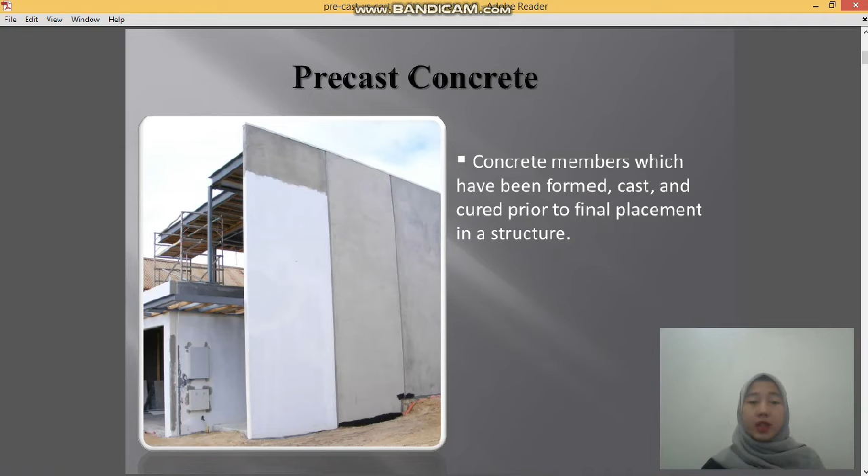Today, I'm going to explain about precast concrete versus cast-in-situ concrete. Precast concrete members are formed, cast and cured prior to final placement in a structure.

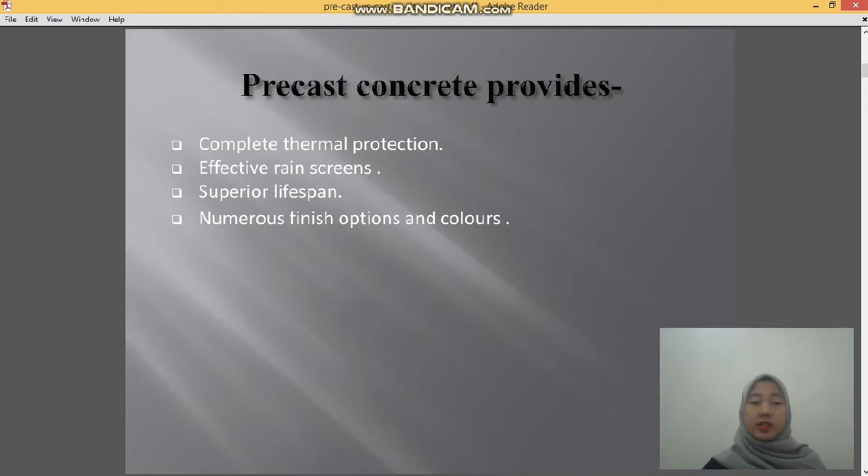Precast concrete provides: 1. Complete thermal protection. 2. Effective rain screens. 3. Superior lifespan. 4. Numerous finish options and colors.

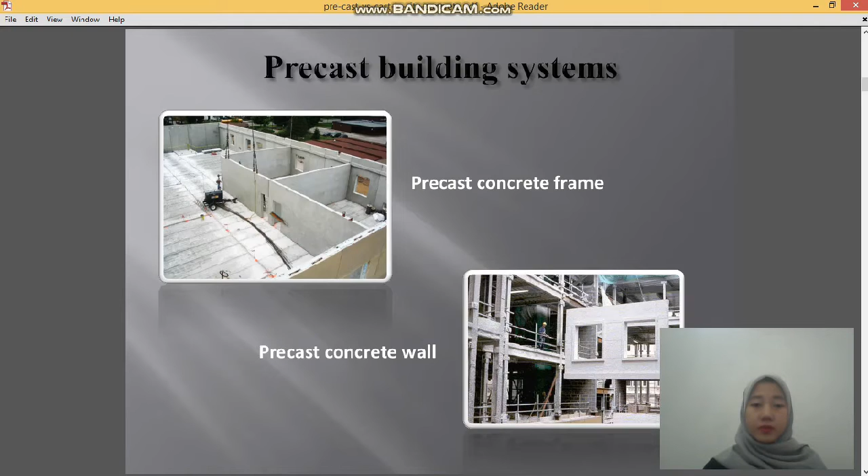Cast-in-situ concrete: liquid material is poured in form at the building site.

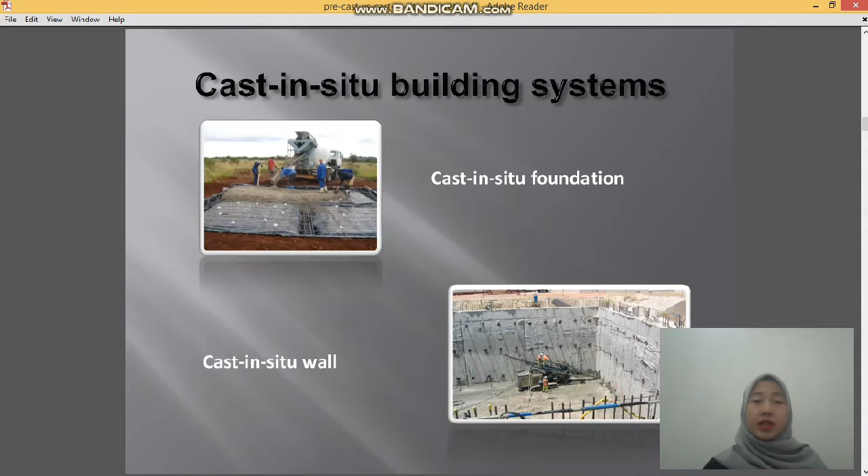Cast-in-situ building system includes cast-in-situ foundation and cast-in-situ wall stretch. Cast-in-situ concrete has less strength as compared to precast concrete.

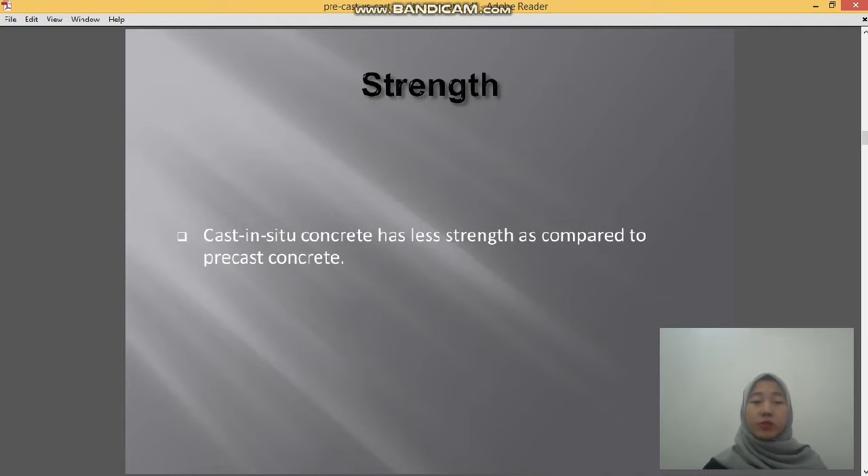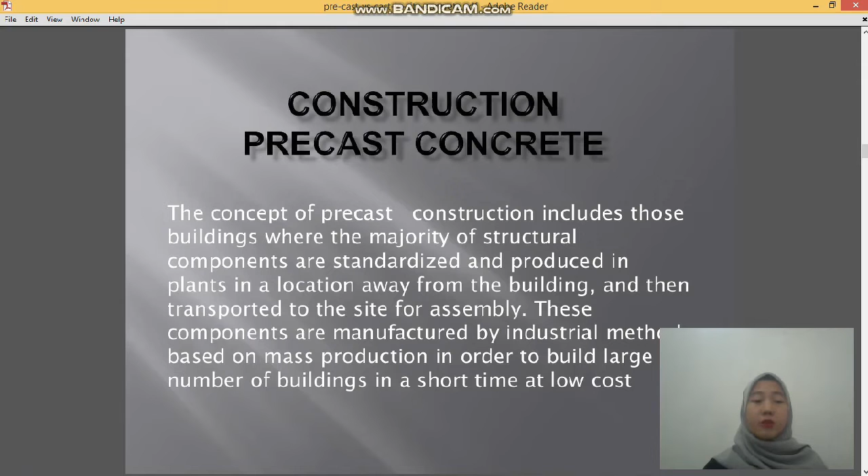Construction of precast concrete: the concept of precast construction includes those buildings where the majority of structural components are standardized and produced in a plant in a location away from the building, then transported to the site for assembly. These components are manufactured by industrial methods based on mass production in order to build a large number of buildings in a short time at low cost.

Depending on the load-bearing structure, precast systems can be divided into the following categories: 1. Large panel system. 2. Frame system. The designation large panel system refers to multi-story structures composed of large wall and floor concrete panels connected in the vertical and horizontal direction.

So that the wall panels enclose appropriate space for the rooms within a building, the panels form a box-like structure. Both vertical and horizontal panels resist gravity load.

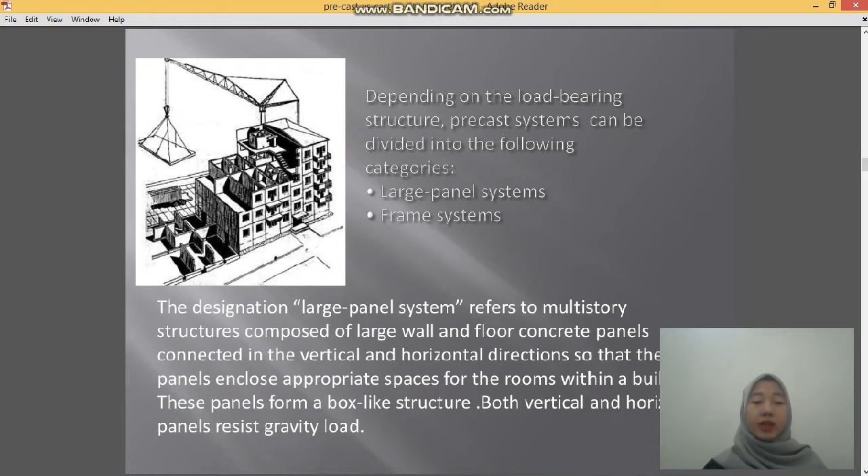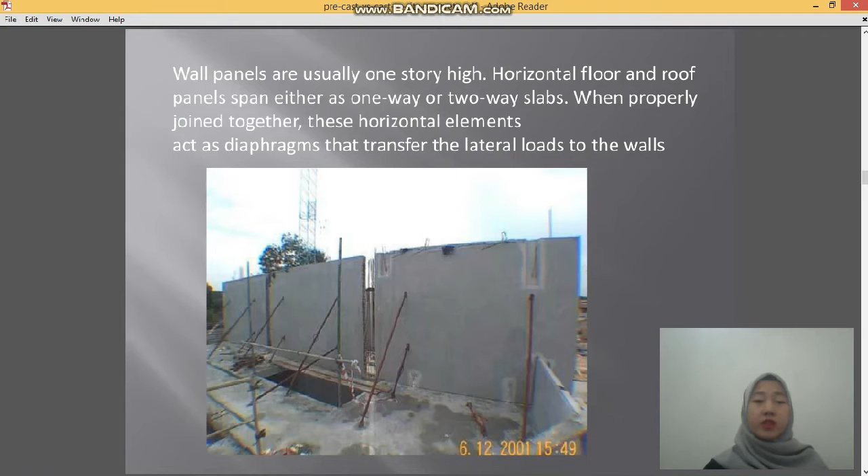Wall panels are usually one story high. Horizontal floor and roof panels span either as one-way or two-way slabs. When properly joined together, these horizontal elements act as a diaphragm that transfers the lateral load to the walls.

Depending on the construction method, these joints can be classified as wet and dry. Wet joints are constructed with cast-in-place concrete poured between the precast panels. To ensure structural continuity, panels are welded, looped, or otherwise connected in the joint region before the concrete is placed.

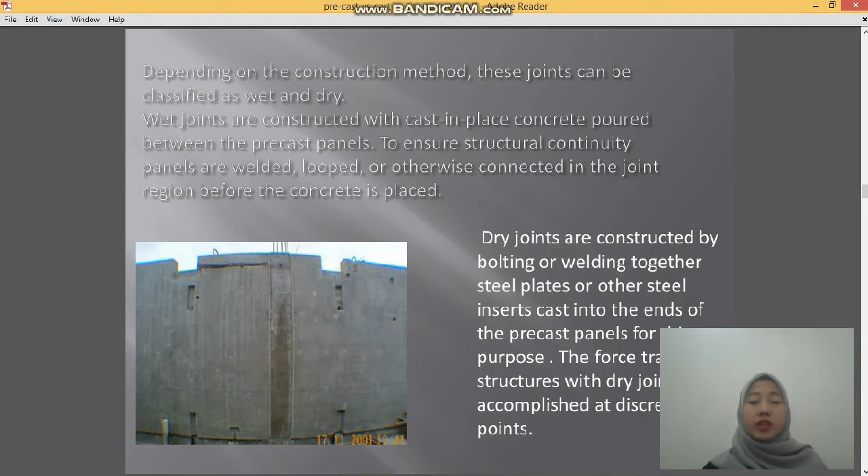Dry joints are constructed by bolting or welding together steel plates or other steel inserts cast into the ends of the precast panels for this purpose. The force transfer in structures with dry joints is concentrated at discrete points.

Frame system: precast frames can be constructed using either linear elements or spatial beam-column sub-assemblies. The use of linear elements generally means placing the connection at the beam-column junction.

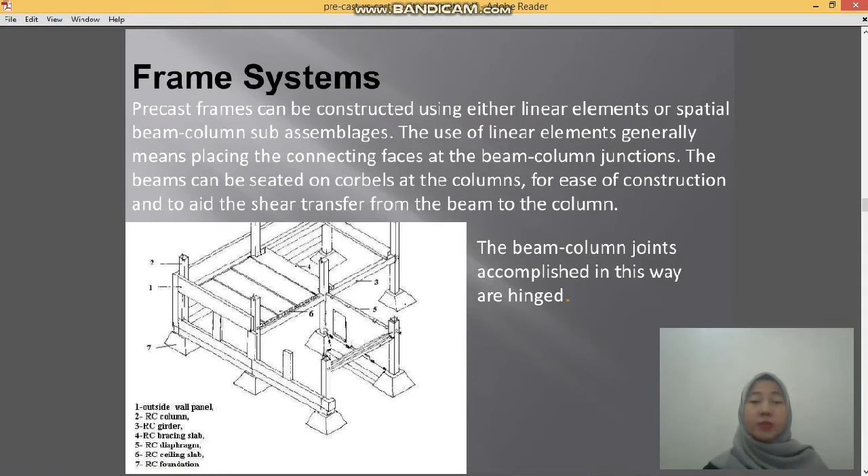The beams can be seated on corbels at the column for ease of construction and to aid the shear transfer from the beams to the column. The beam-column joints completed in this way are hinged.

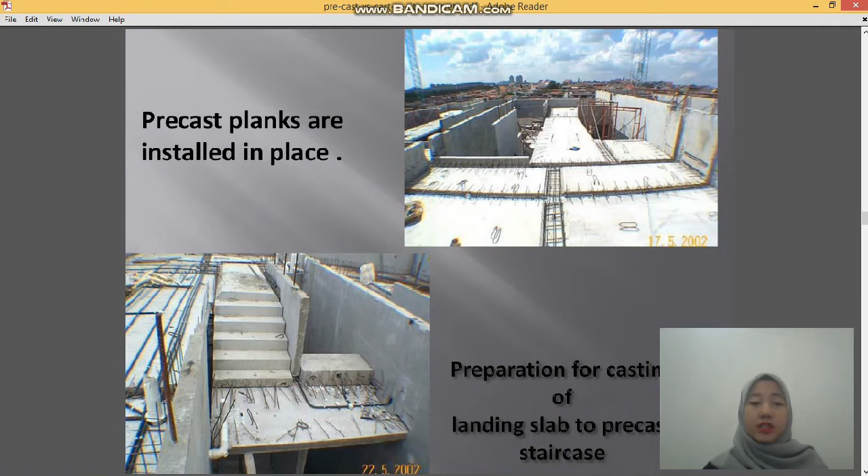Precast planks are installed in place. Preparation for casting of the landing slab to the precast staircase.

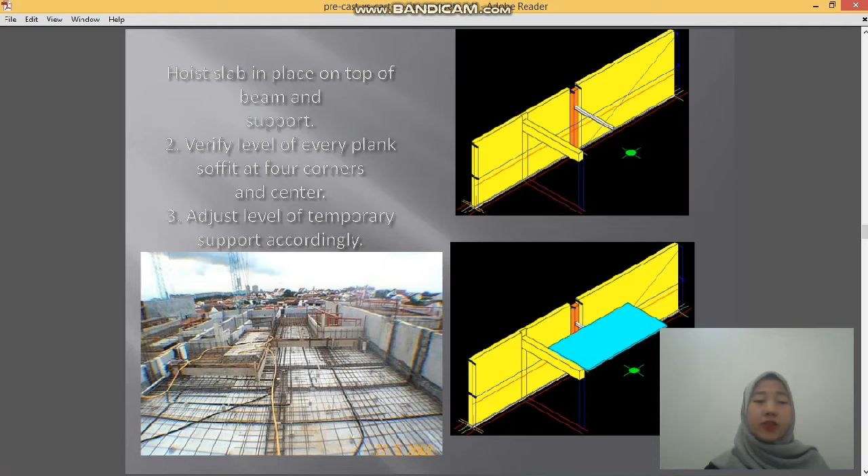1. Hoist slab in place on top of beams and supports. 2. Verify level of every plank soffit at four corners and center. 3. Adjust the level of temporary support accordingly.

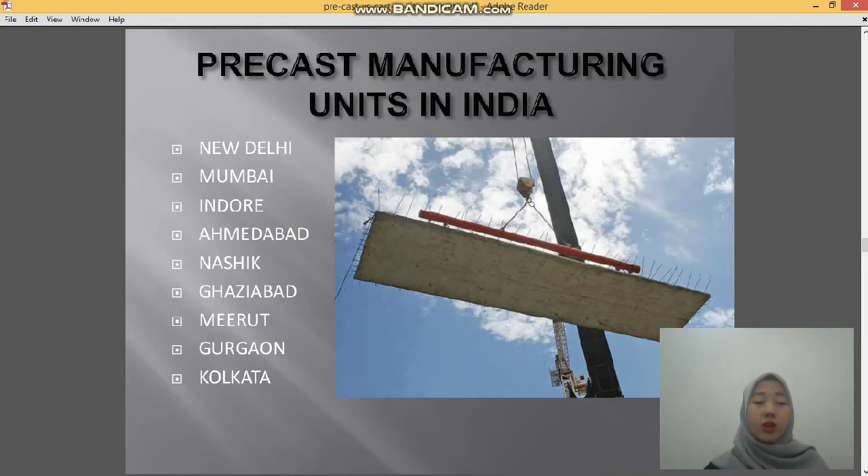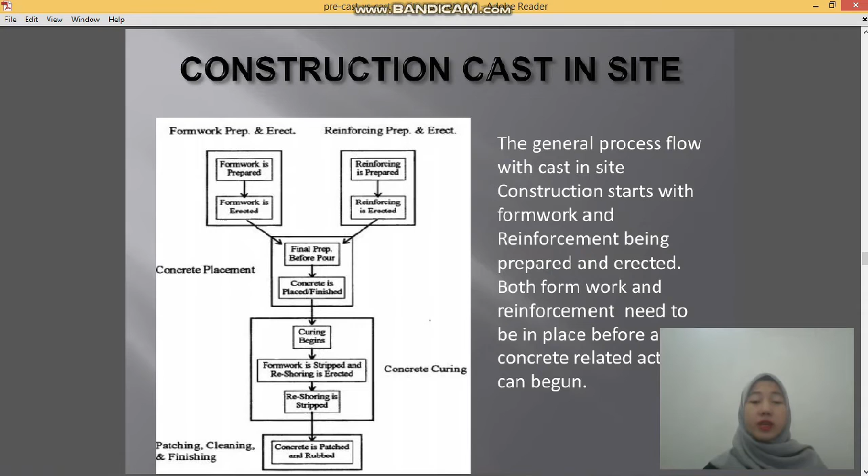Construction of cast-in-situ: the general process flow with cast-in-situ construction starts with formwork and reinforcement being prepared. Both formwork and reinforcement need to be in place before any concrete related activity can begin.

Formwork is the structural unit designed to support and mold freshly placed concrete, while it cures and strengthens. They are generally temporary, however, some are designed to be left permanently in place within the structure as stay-in-place formwork.

Usually within a few days, the concrete is strong enough to support its design load and the formwork can be removed to be used elsewhere on the site.

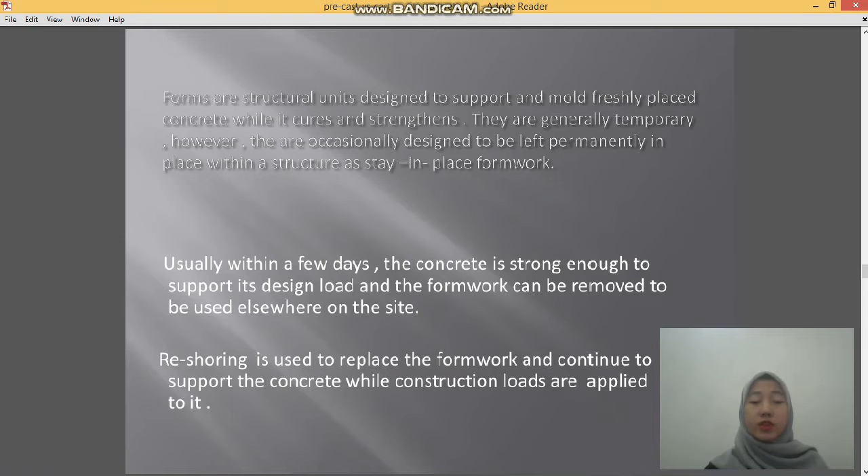Re-shoring is used to replace the formwork and continue to support the concrete while construction loads are applied to it, including beams, formwork, and reinforcement. When all the formwork and reinforcement are in place, with concrete delivered and placed in the formwork around the reinforcement, exposed concrete surfaces requiring leveling and smoothing are finished and curing begins.

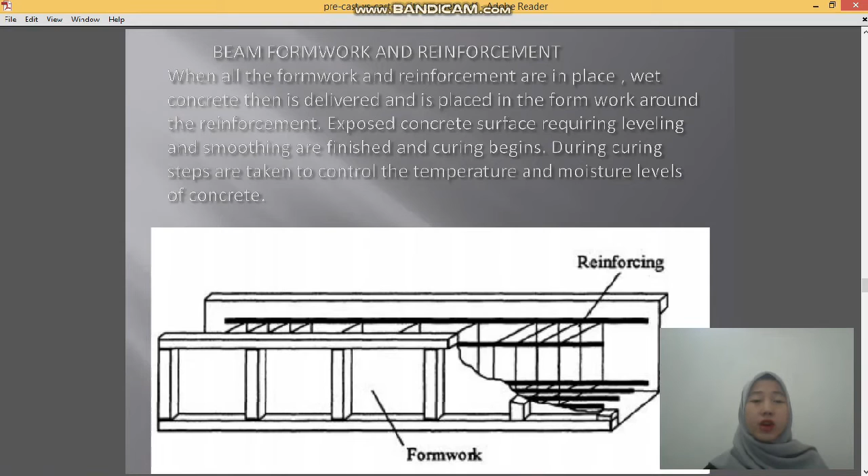During curing, steps are taken to control the temperature and moisture level of the concrete. A single concrete placement typically gives rise to numerous reinforced concrete members.

Sometimes concrete is deposited in the formwork of each member individually, such as a column, but often it is deposited monolithically. Monolithic concrete placement is when concrete is deposited in one large formwork system which is made up of several smaller formwork systems, each corresponding to a different concrete member.

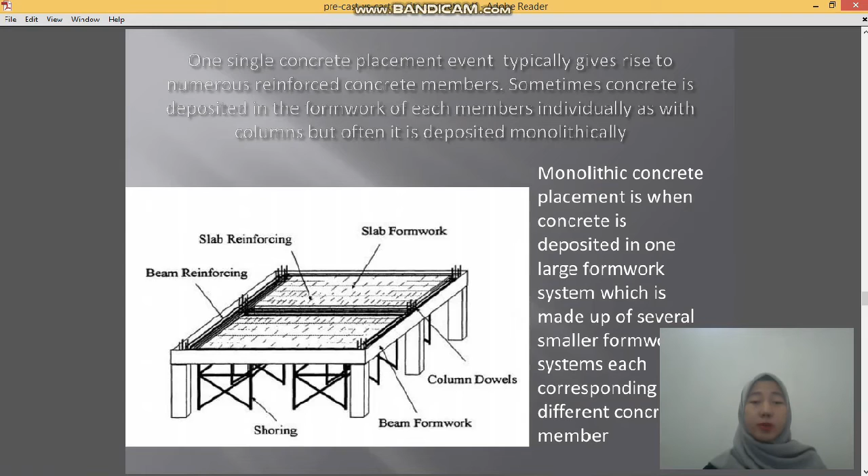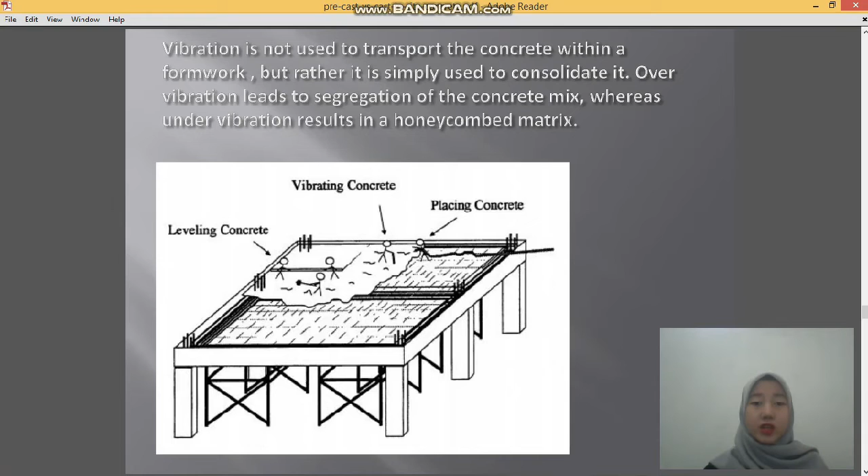Vibration is not used to transport the concrete within one formwork, but rather it is simply used to consolidate it. Over-vibration leads to segregation of the concrete mix, whereas under-vibration results in a honeycombed matrix.

Finishing of concrete is done just after leveling, while the concrete is still wet, and typically involves running a float over the surface of the concrete. This is done to remove slight imperfections from the surface and embed any exposed aggregate just below the surface of the concrete.

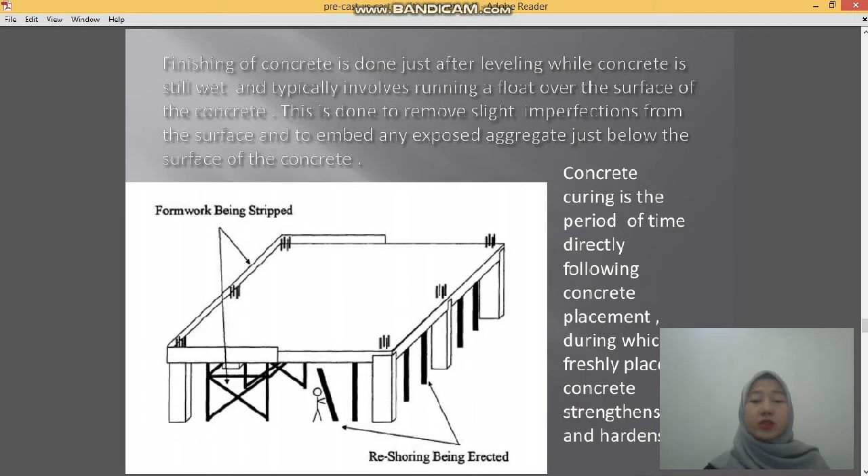Concrete curing is the period of time directly following concrete placement, during which freshly placed concrete gains strength and hardness.

Precast concrete. First, precast structures can be reused, extended, and refitted internally. Structures do not need to be demolished and can simply be renovated internally, conserving resources and reducing waste and landfill.

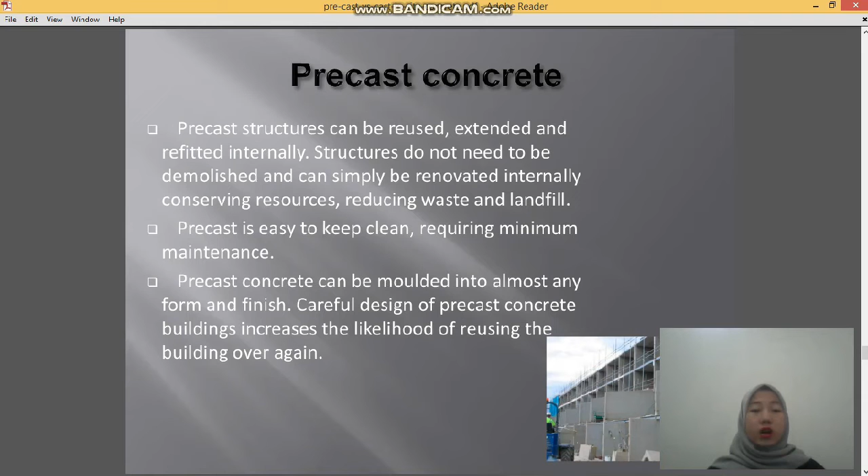Second, precast is easy to keep clean, requiring minimum maintenance. Third, precast concrete can be molded into almost any form and finish. Careful design of a precast concrete building increases the likelihood of reusing the building over again.

Fourth, precast concrete doesn't shrink, distort, or move, and does not deteriorate with exposure to climatic change.

Fifth, being flood resistant, precast concrete does not erode or rot, and therefore is suitable for river and coastal barriers to protect against high tides and storms.

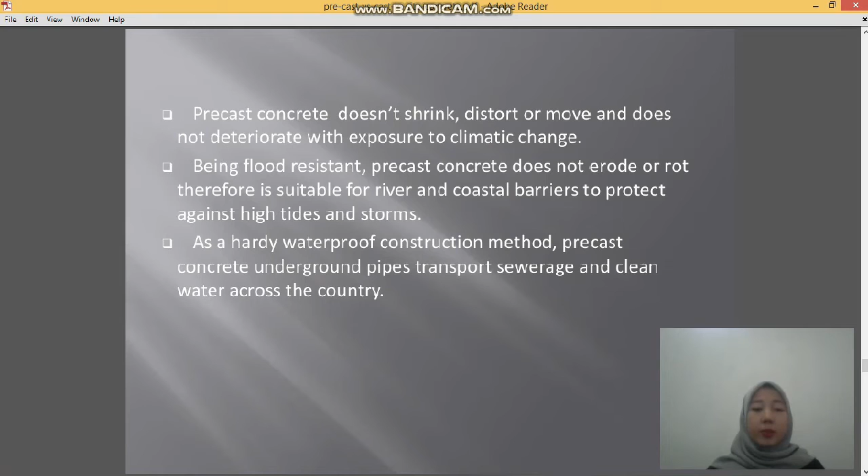Sixth, as a hardy waterproof construction method, precast concrete underground pipes transport sewerage and clean water across the country.

Cast-in-situ concrete. First, concrete is ordered and placed as needed and does not need to be trimmed or cut after installation.

Second, wash water is frequently recycled using trucks equipped with devices that collect wash water and return it to the drum, where it can be returned to a ready-mix concrete plant for recycling.

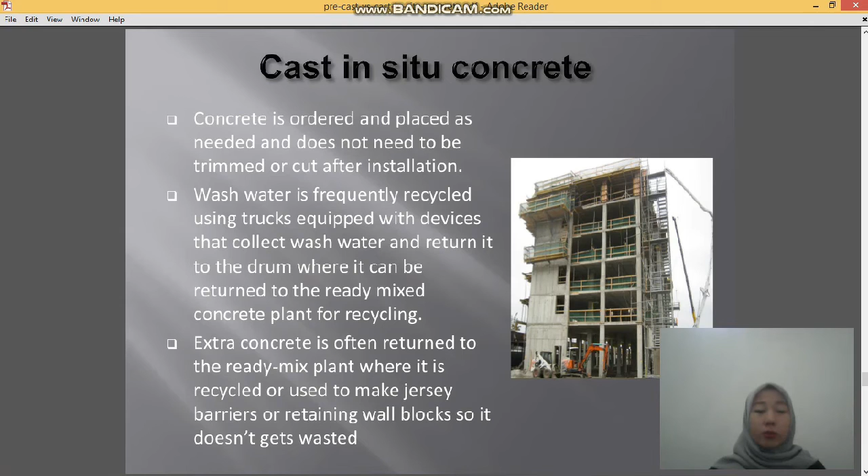Third, extra concrete is often returned to the ready-mix plants where it's recycled or used to make jersey barriers or retaining wall blocks so it doesn't get wasted. Fourth, or it can be washed out to recycle the coarse aggregate.

Special retardant admixture can be added to returned concrete to allow for storage and future use. Fifth, it reduces the heat island effect when used for exposed horizontal surfaces.

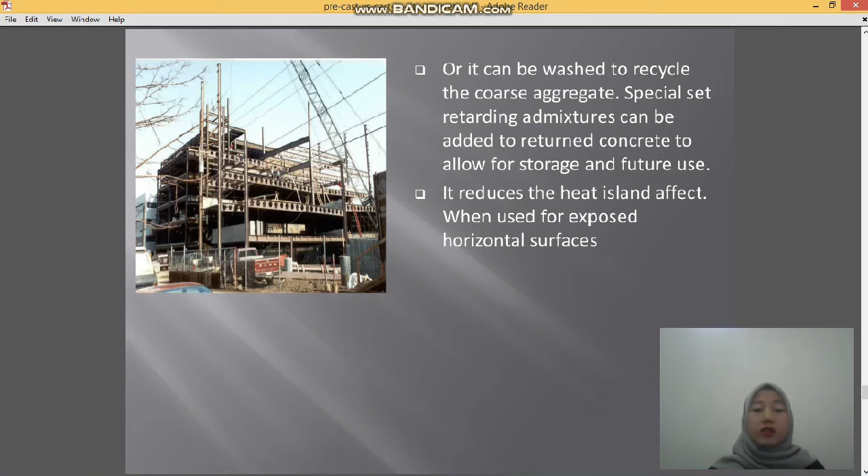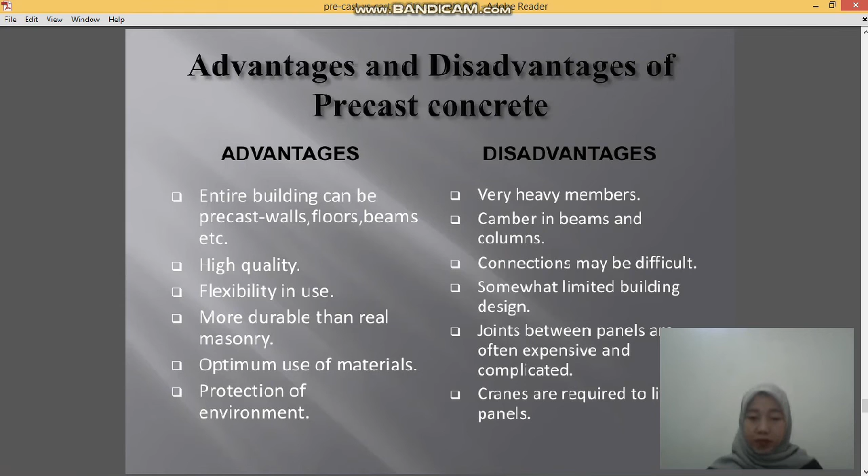Disadvantages: first, very heavy members. Second, camber in beams and columns. Third, connections may be difficult. Fourth, somewhat limited building design. Fifth, joints between panels are often expensive and complicated. Sixth, cranes are required to lift panels.